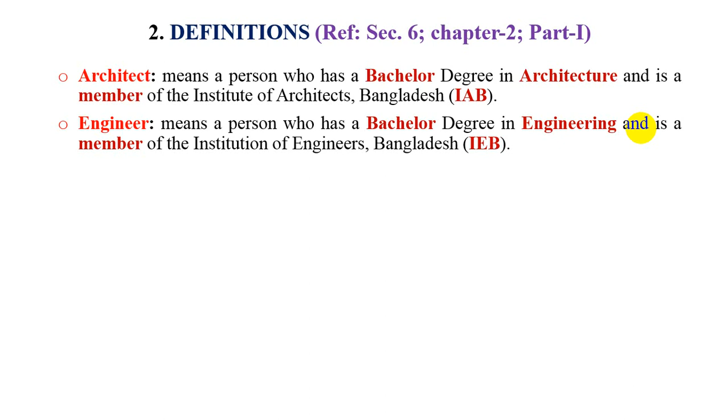Now let's go to definitions of some parts, reference section 6 chapter 2 part 1. Architect: who is the architect as per BNBC? Must contain a bachelor degree in architecture from any university in Bangladesh or abroad, and must be a member of the Institute of Architects, IAB. Engineer: as per BNBC rules, an engineer is such person who has a bachelor degree in engineering and is also a member of the Institute, IEB.

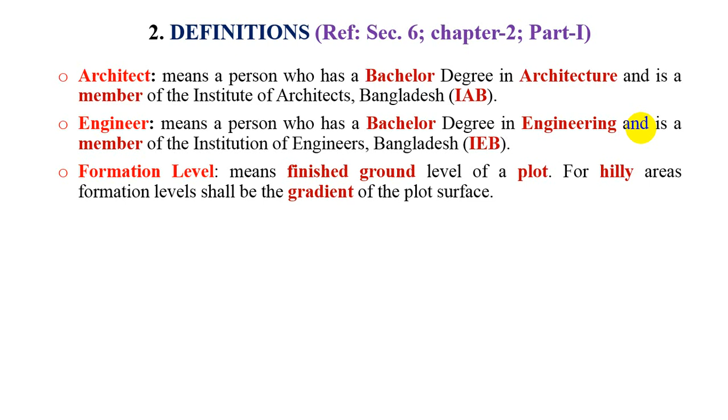Geotechnical engineer, as per BNBC, must have a master's degree and at least 2 years of professional geotechnical experience, or otherwise 10 years bachelor degree with 10 years experience in geotechnical related works. And plumbing engineers may be civil or mechanical, either of them.

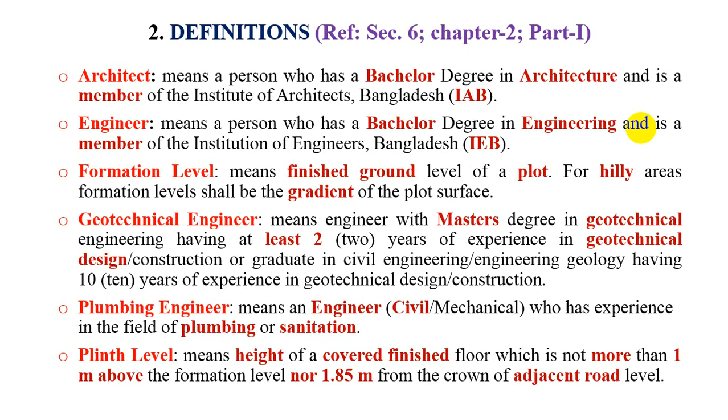Plinth level means the height of a covered finished floor, and this height is not more than 1 meter above the formation level, nor 1.85 meters from the crown of the adjacent road level.

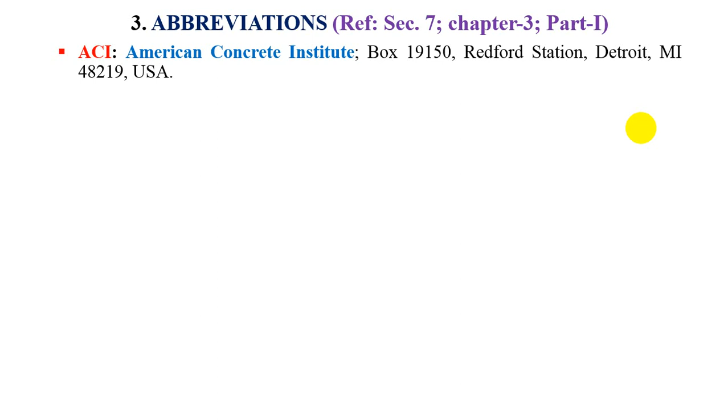Now let's see some abbreviations, reference section 7 chapter 3 part 1. ACI, the most familiar, American Concrete Institute. Also its address is present here, Detroit, USA. Every abbreviation in this video is shown with its full meaning and also its address.

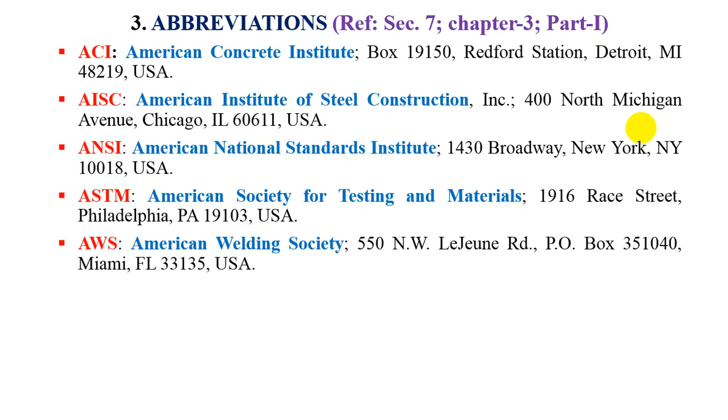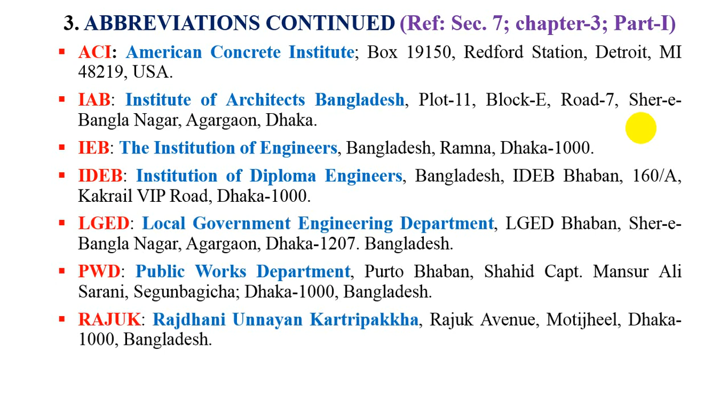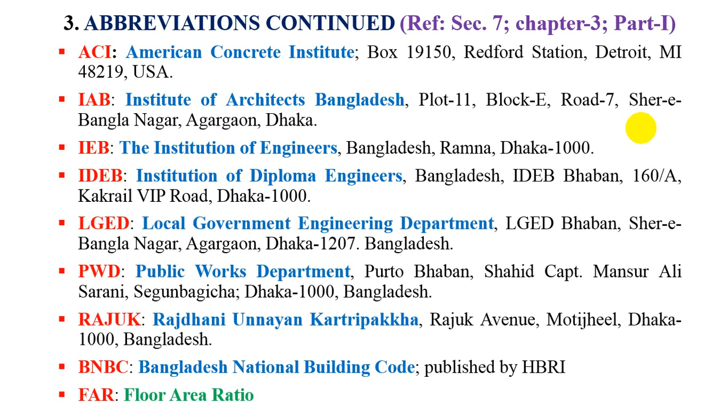Also AISC, ANSI, ASTM, AWS, BSI, BSTI, BWDB—it should be continued. Also ACI, IAB, Institute of Architects Bangladesh, IEB, Institution of Engineers, IDEB, Institution of Diploma Engineers, LGED, PWD, Rajuk is the most important topic—Rajuk, Rajdhani Unnayan Kartripakkha—and BNBC, and FAR, which is a very important part of the calculation process, FAR, floor area ratio.

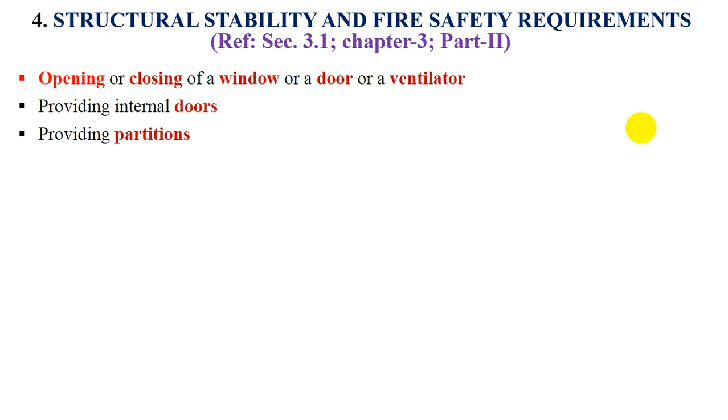Now, structural stability and fire safety requirements. Some general requirements are involved in structural stability as well as fire safety. Number one, opening or closing of a window, door, or ventilator. Number two, providing internal doors. Number three, providing partitions like partition walls. Number four, providing false ceiling. Number five, gardening. Number six, painting. Number seven, plastering and patchworks.

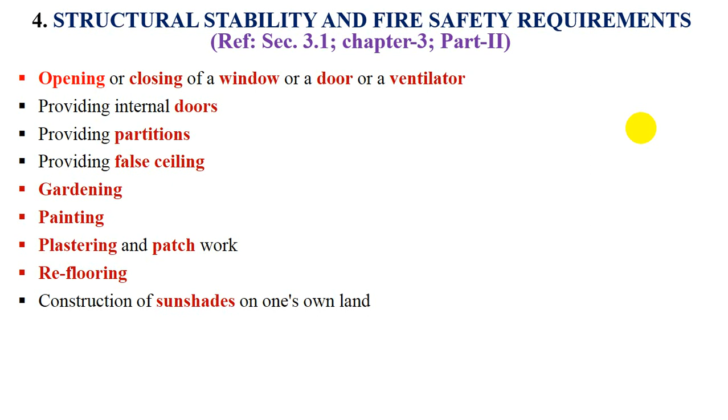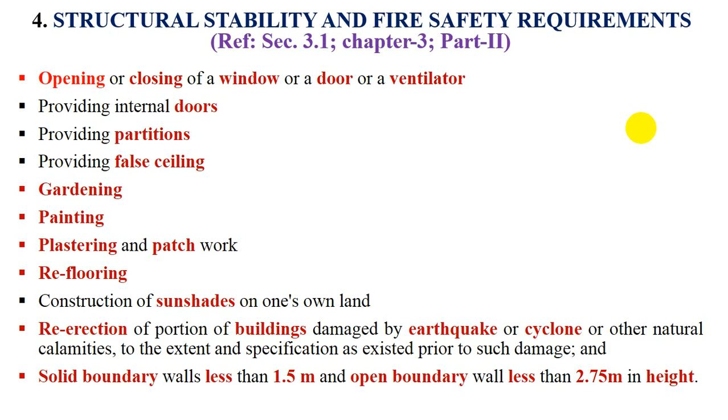Then reflooring, and construction of a sunshade on one's own land. Other items include re-erection of a portion of a building damaged by earthquake or cyclone, and solid boundary walls less than 1.5 meters and open boundary walls less than 2.75 meters in height.

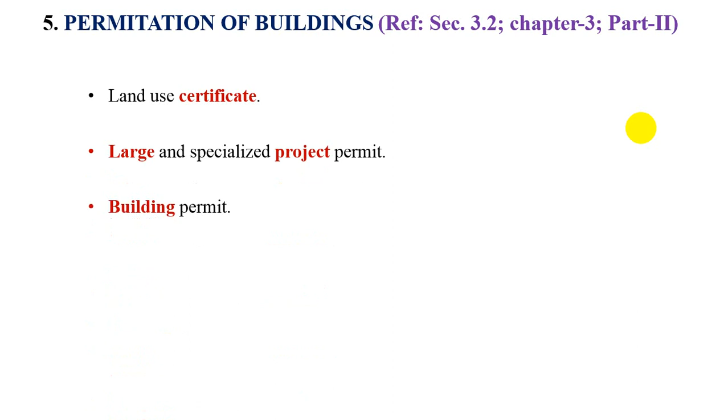And permitation of buildings. For permitation of buildings, 4 documents must be necessary: Number 1, land use certificate. Number 2, large and specialized project permit. Number 3, building permit. Number 4, occupancy certificate.

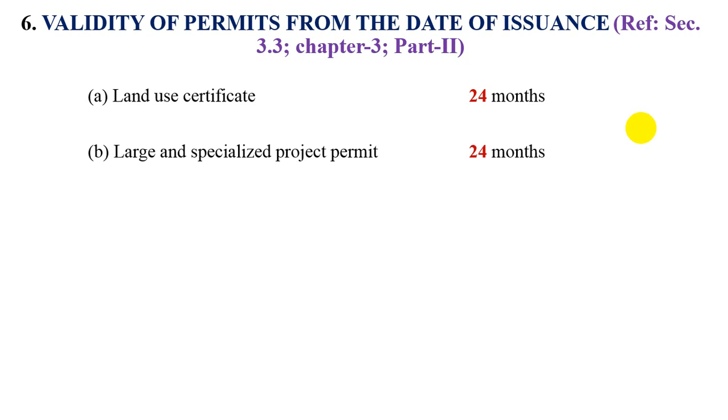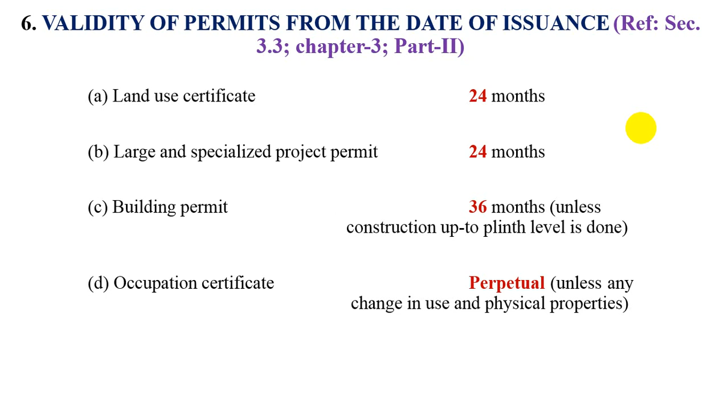Validity of permits from the date of issuance: land use certificate 24 months, large and specialized project permit 24 months, building permit 36 months unless construction up to plinth level is done, and occupation certificate is perpetual unless there is any change in use and physical properties.

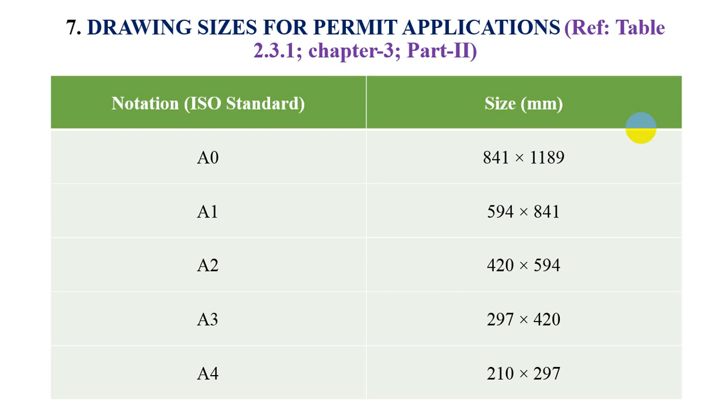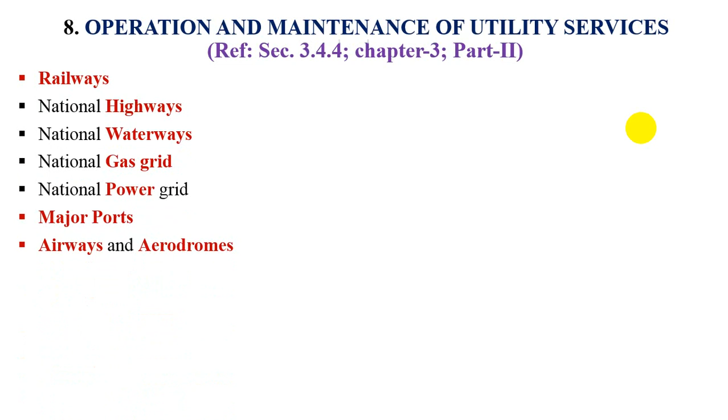However, operation and maintenance of utility services. Number 1: railways, national highways, national waterways, national gas grid, national power grid, major ports, airways and aerodromes, telecommunications, electronic broadcasting services, and any other services which the government may notify and declare to be a service for the purpose of government opinion.

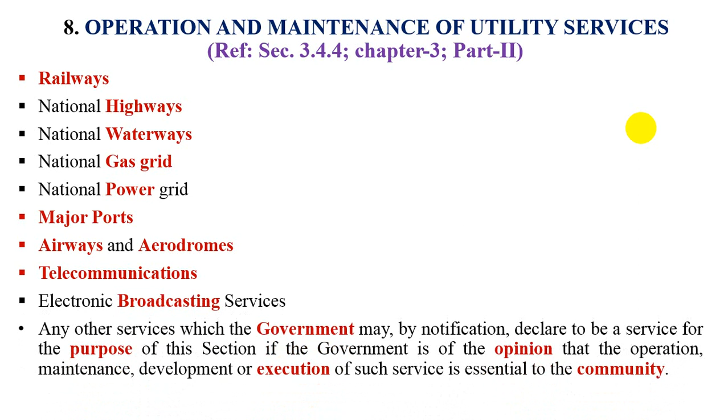And then time limit for disposal of the application for permits. There are 4 types of permits, as we saw previously, and maximum time allowed for disposal, approval or refusal by the building officials.

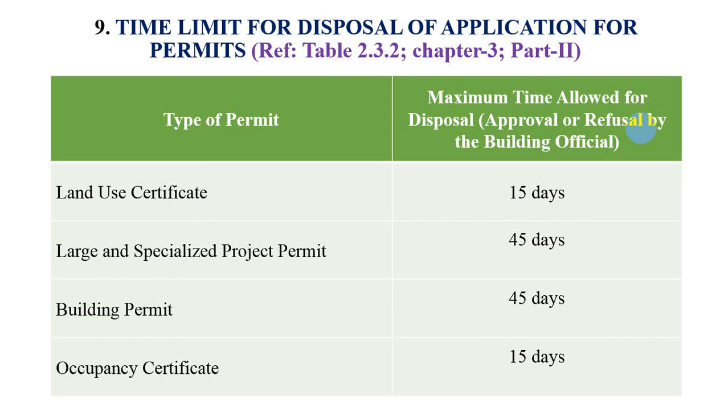Number 1, land use certificate, 15 days maximum allowed time. Large and specialized project permit, 45 days. Building permit within 45 days. Occupancy certificate within 15 days.

And building classification based on height, floor area and occupancy type. There are 4 types or 4 categories of building. Category 1, floor area up to 250 meter square, and occupancy type A.

Building category 2, floor area up to 1000 meter square, type of occupancy A, that means A1 to A5. Building category 3,

which includes buildings up to 10 stories or 33 meter height for engineering design and supervision, and any height for land survey, subsoil investigation and architectural design. Floor area up to 7,500 meter square, and type of occupancy A, B, C, a lot of. And building category 4, any height, any size, all occupancy types.

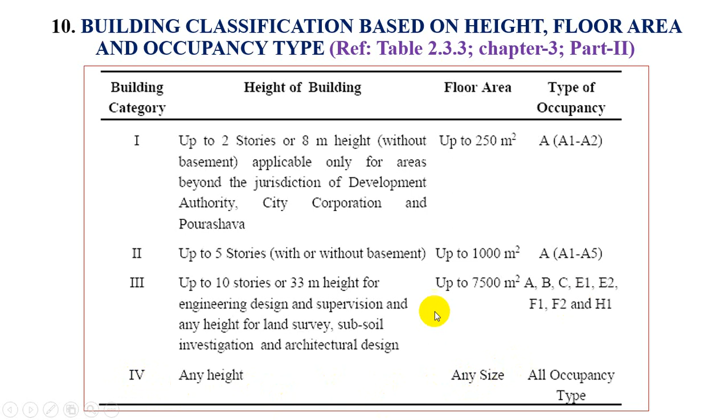So limitation only for 1, 2 and 3, but 4 is unlimited. Now, eligible registered or licensed professionals for signing of design, drawings, reports and documents. Number 1, land survey.

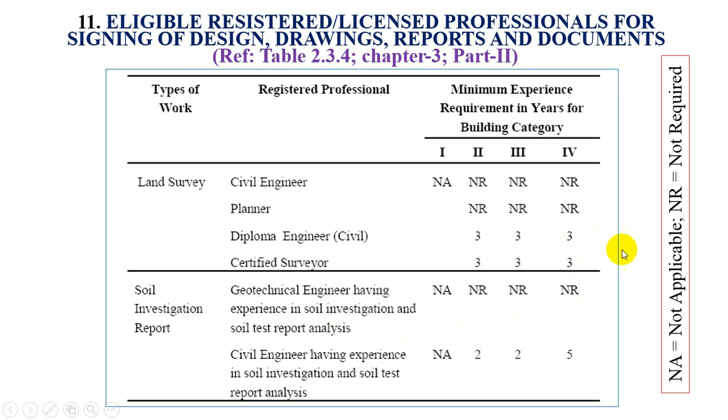Then a civil engineer - NA means not permitted or not applicable, NR means not required. There are a lot of types of works and a lot of registered professionals. And then architectural design, as an architect,

And civil engineers - type 3 and type 4 not eligible for architectural design, must be included by an architect.

And diploma architect not eligible for type 3 and type 4.

And structural design - civil engineer with experience in structural design, or PEng. PEng is the certification from IEB.

And minimum experience requirement for building category 1 is not applicable, and must be minimum experience 2 years for category 2, category 3 is 4 years, and category 4 is 8 years. 5 years must be in structural design specifically, otherwise not applicable.

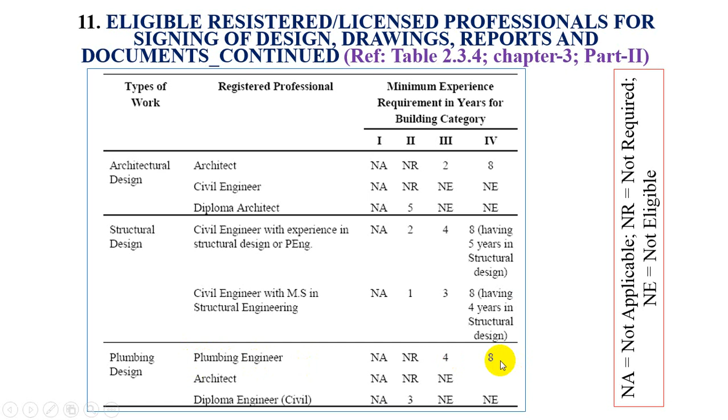And then electrical design, construction supervision, and building demolition completion report.

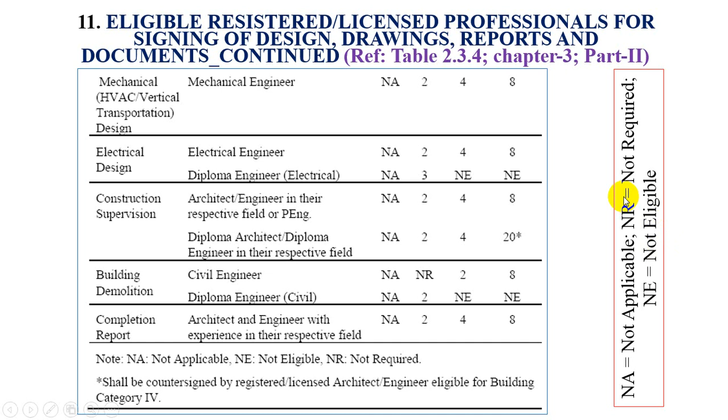Here is a star marking. This star marking means it shall be countersigned by a registered or licensed architect or engineer eligible for building category 4. Here NA means not applicable. Similarly, NA means not applicable, NR means not required, and NE also indicates not eligible.

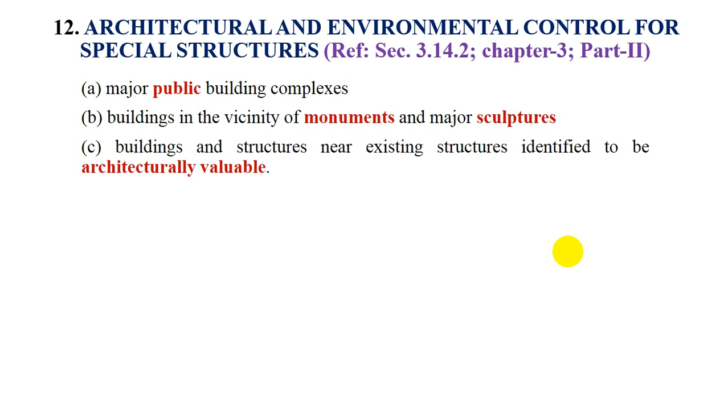And architectural and environmental control for special structures - which types of controls? Number 1, major public building complexes, buildings in the vicinity of monuments and major sculptures, buildings and structures near existing structures identified to be architecturally valuable, and buildings and structures near historic buildings or in areas of historical or archaeological significance, building near any structure that represents the special characteristics of an area,

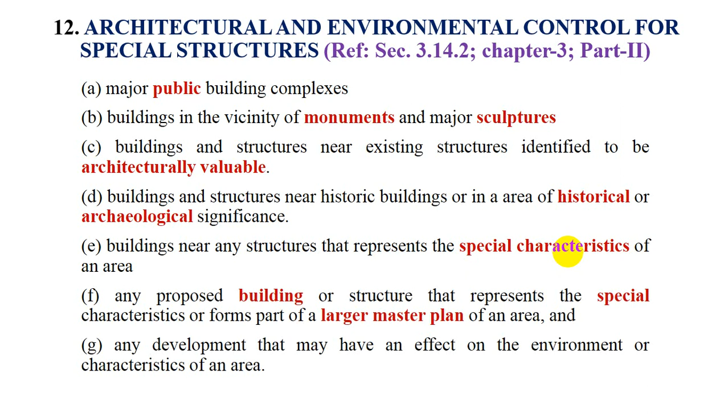and proposed buildings involving some special characteristics, and large master plans of an area, and development of an area from an environmental and architectural perspective.

Appendix B forms for certificate of supervision. Appendix C forms for sanction or refusal of land use, development, building permit. Appendix D form for appeal against refusal of any permit. Appendix E form for completion certificate. Appendix F form for occupancy certificate. These are the six types of forms for several certificates and several approvals of building by the respective authority.